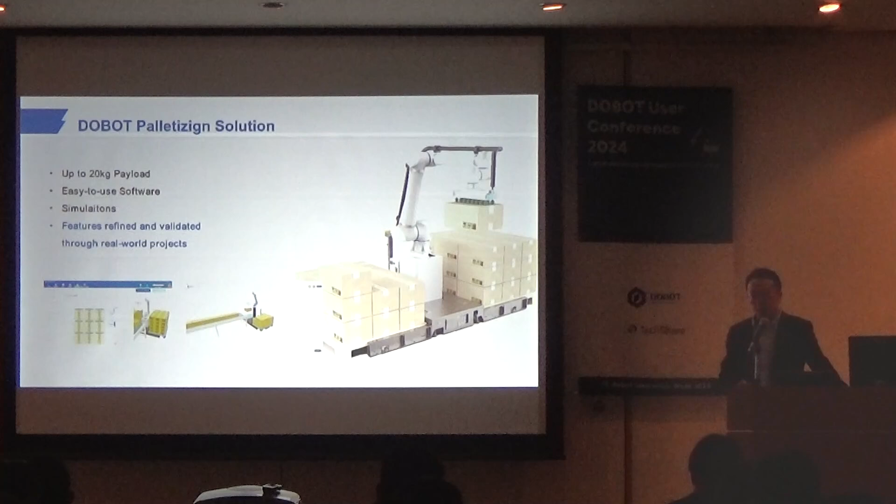And we also had the palletizing solution. We launched this at the beginning of this year, and this year we have more than hundreds of palletizing solutions running in different factories. And in the next speech, our colleague Tamara-san will talk more about the palletizing solution. So I will skip this part.

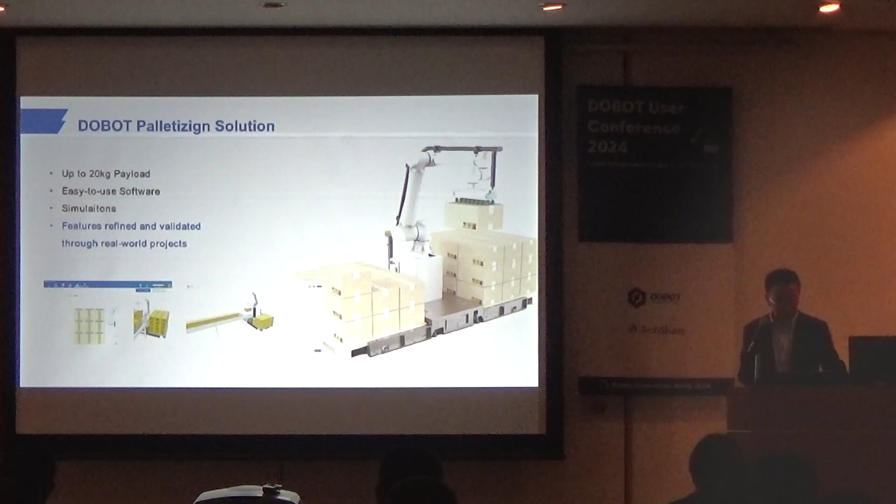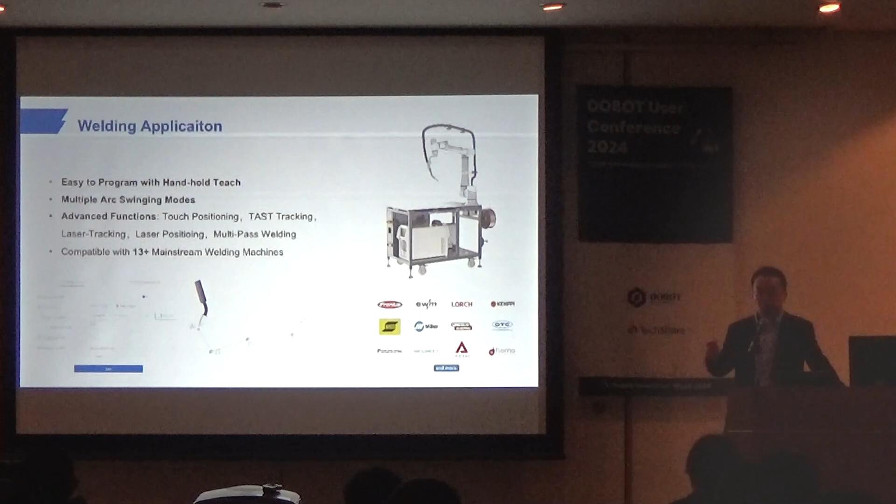And the next one is welding. Welding is usually done by an industry robot, but the cobot is very easy to use, and it has this hand guide teaching function. So you can hold the robot to the right position, and you can teach the point. In that case, for welding, if you want to teach the robot the welding path, it becomes much more efficient. And the cobot is also lightweight, so you can move the robot to a different place.

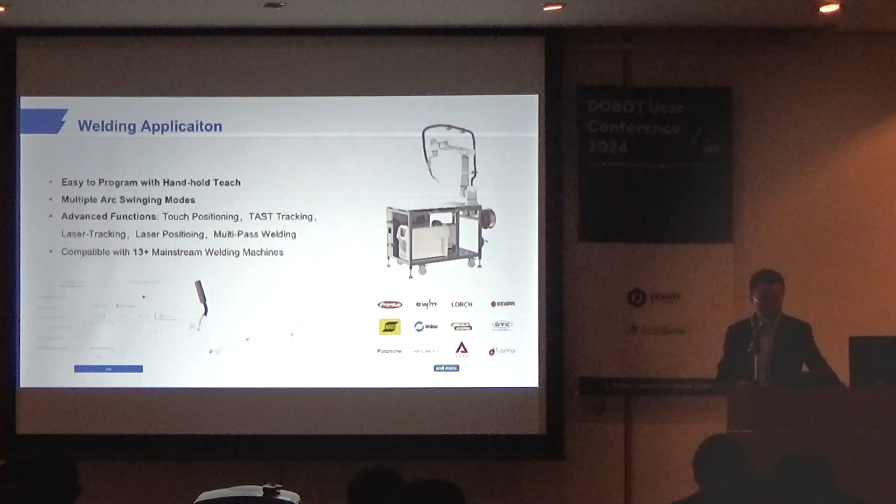And especially we see in shipyards and some steel manufacturing factories, people put the robot on a magnetic seat, so you can attach the robot to different places. And we also have some multiple arc swinging modes, and during the year we also developed some advanced functions for welding, such as touch positioning, laser tracking, laser positioning, and multipass welding, especially for thick steel, where you need multipass welding. And we are also compatible with more than 13 welding machines, and the number is still increasing.

And lastly is DOBOT X-Trainer. DOBOT X-Trainer is a platform to explore imitation learning. That's also one direction we are trying to explore. And this is a platform with two master hands, or so-called primary hands. And this hand is used to operate the slave hand. And here we use Nova 2 as the slave hand because of the high precision.

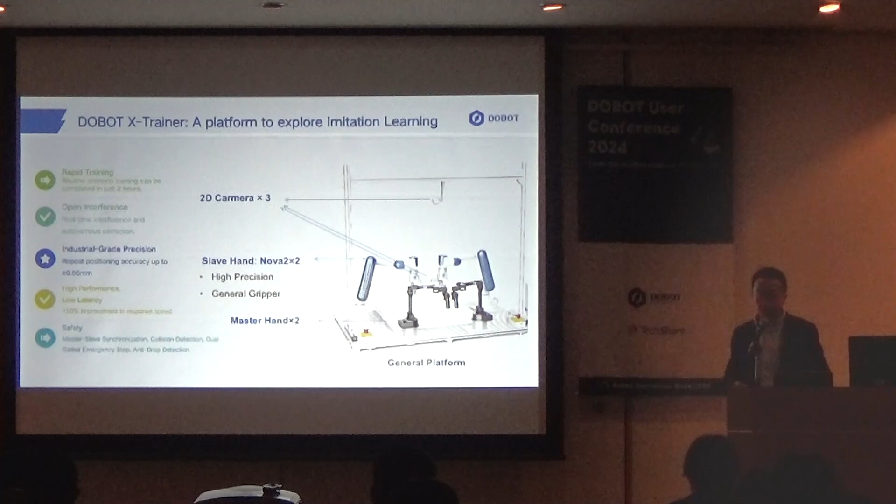And at the end of the slave hand, it has a very general purpose gripper. And there are also 3 2D cameras. One is on top of the framework, and the other 2 are at the end of the robot arm. So, what is X-Trainer? I will explain with this video.

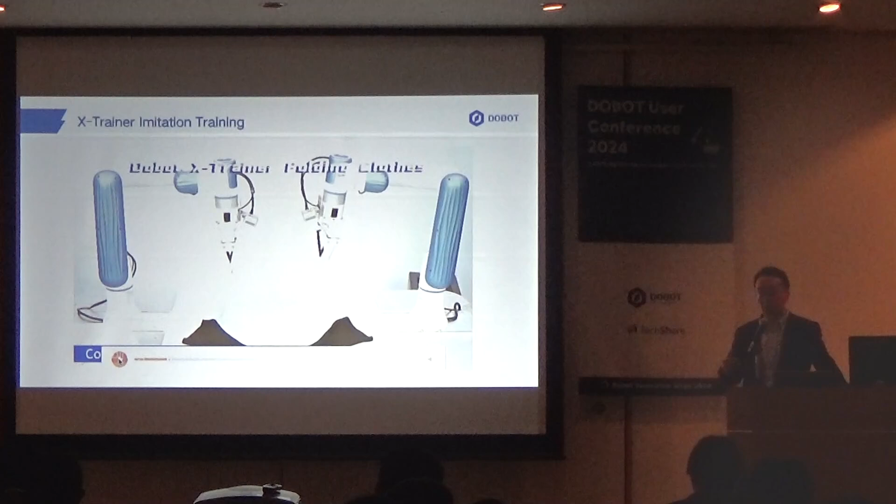So generally, robots are very good at standard and repetitive tasks, especially some standard processes. And to do that, we also need a very standard environment, or so-called structured environment. So the robot knows where the object is and where to put the object, and the environment is constant. But the challenge is that you need to set up the environment for the robot, and you cannot make changes. Or if the environment changes a little bit, you have to reprogram the robot again.

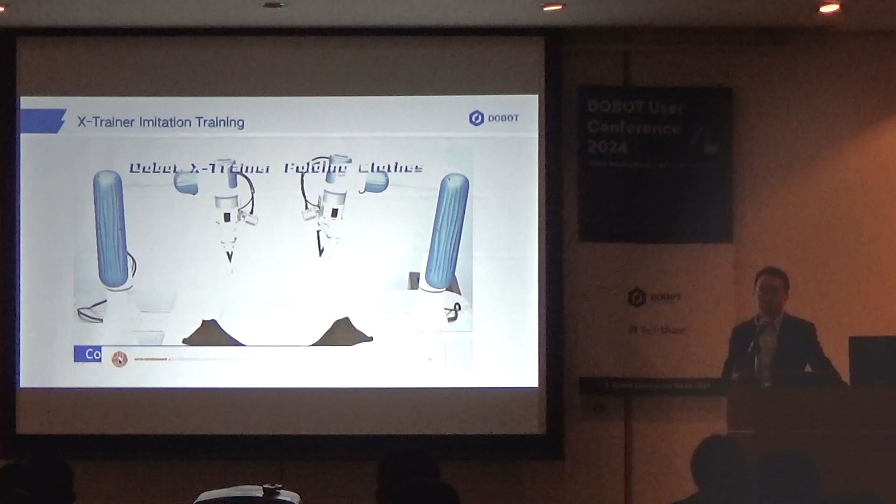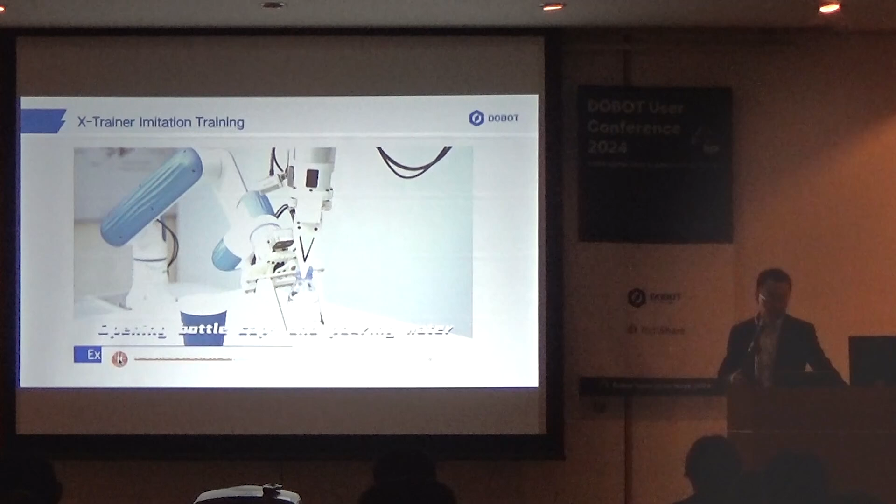For example, for CNC machine tending, if you put a cube inside the machine, it's one program. But if the object is a little bit bigger or a little bit smaller, you need to reprogram the whole process. But with AI developments, the situation could be different. In this case, we can see the 2 Novas folding a t-shirt. And that's very difficult for an industrial robot without AI because clothes are not a rigid object. And there are also some other examples, for example, pouring water into a cup, and handling ping pong balls on the paddle.

But with large language models, you can train the models, and the models control the robot based on the vision perception. And how is it? I'm going to talk about that later.

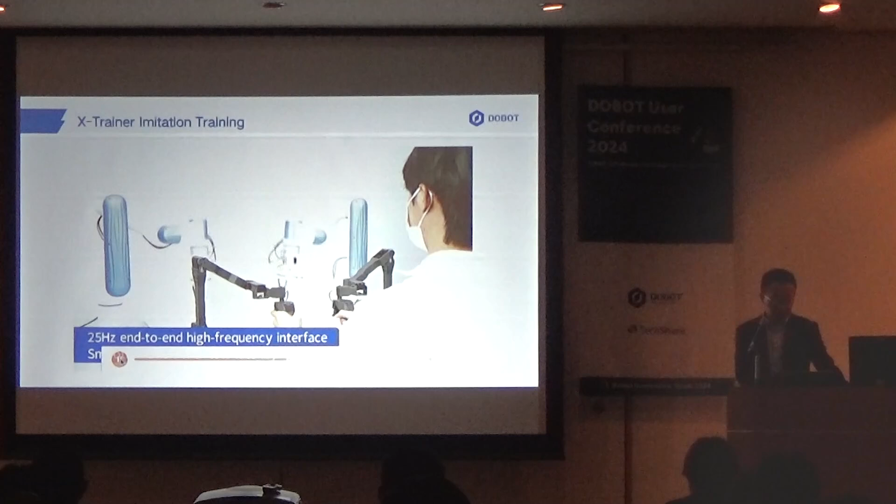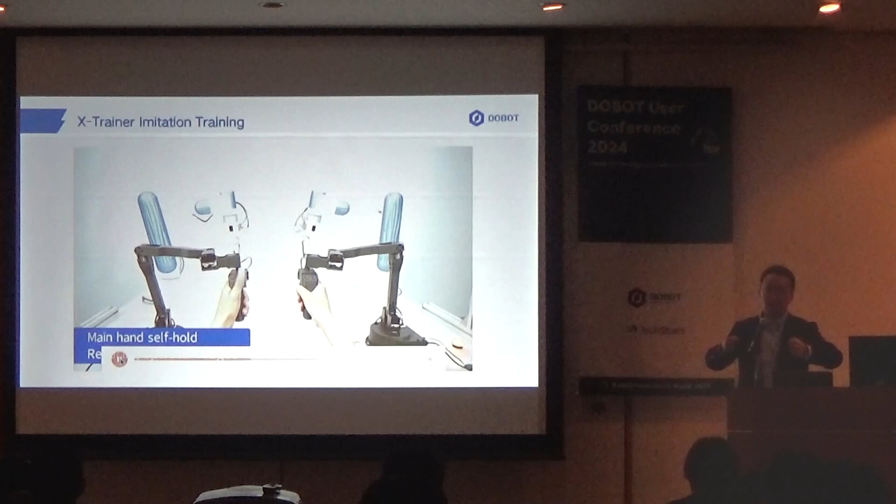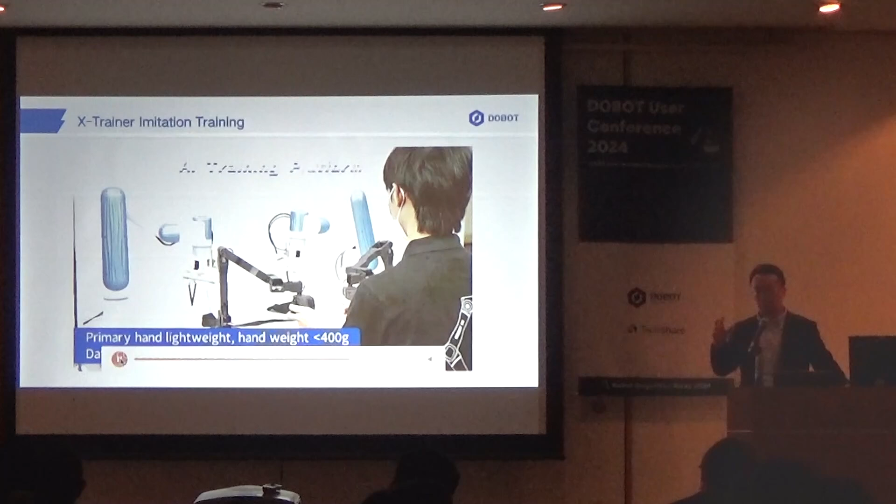So this is a part of introducing what is the hardware. So this is like two primary hands, and you can hold the two hands to manipulate the slave hand. And there are cameras on the slave hand, on the Nova. So during the process, the cameras will take videos. And this is part of how we train the robot to do such a task.

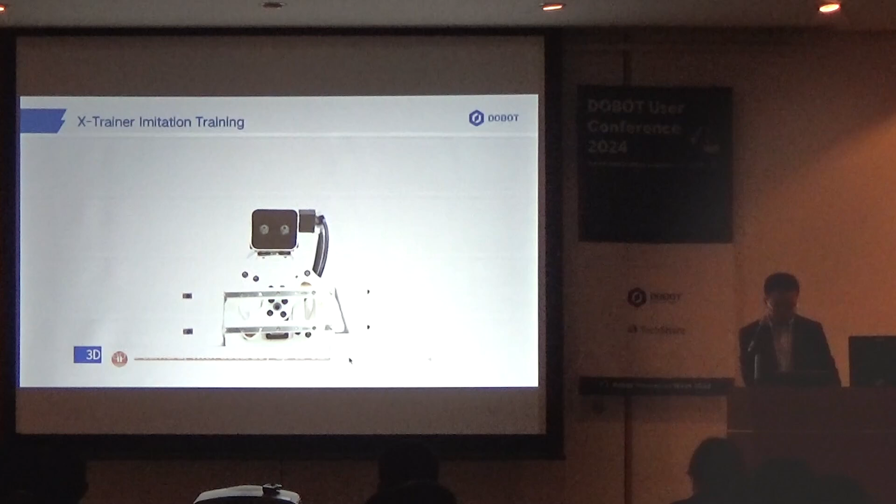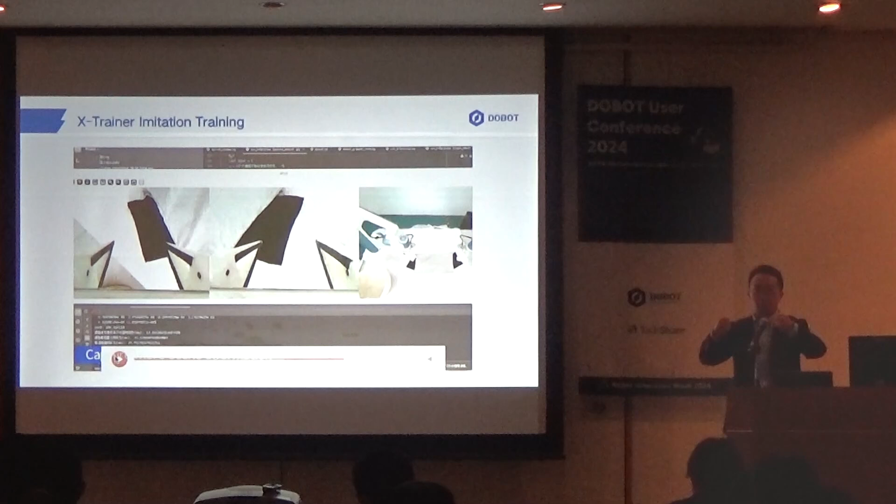So first, I'm going back a little bit and explain this again. So basically, you use the two master hands or primary hands to operate the slave hand to do the work, some kind of teaching. So you teach the robot how to fold a t-shirt.

And during this process, we record the movement of the robot, the trajectory, the points, and maybe some other data. In the meantime, we also record the videos from the three cameras. And based on this input, we teach this robot to do this task many times, for example 50 times, 100 times. At least for now, we need a lot of data to train the robot.

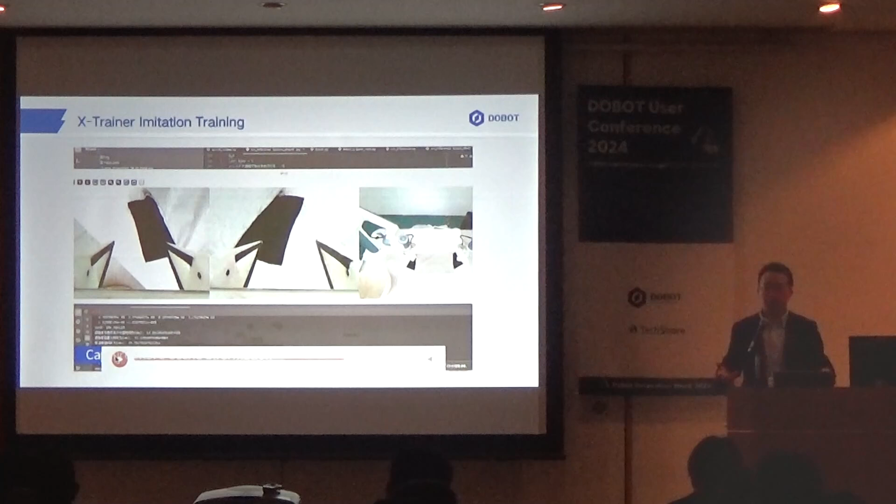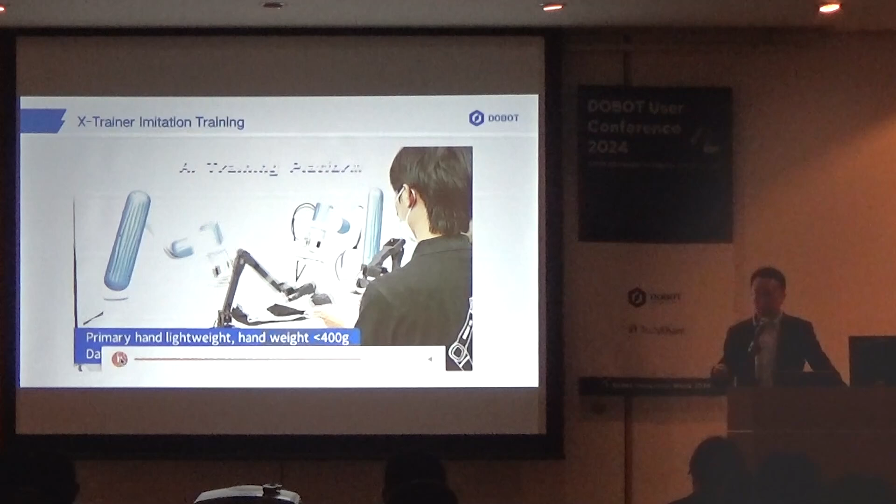And after training, we put all this data with this large language model or some special AI models with robots, and we train them and refine the models. And after that, the robot can do the whole process based on the vision feedback. That's how we do it.

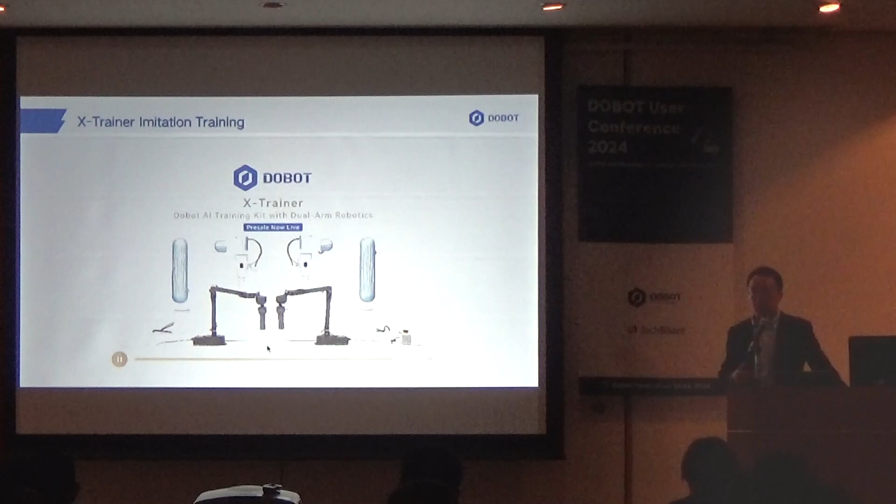But it's still the early stage of this exploration, and this is a platform for exploring this possibility and also collecting data, doing the training and finding out what's next. We all know that AI is developing very fast, especially with large language model technology. And in this direction, there are also a lot of models designed for robot manipulation. That's the direction we are trying to follow.

And with these AI models, I think in the future, people don't need to program the robot point by point or trajectory by trajectory, or set up the I/O on/off at a very specific point. You just need to show how the work is completed, and the robot can learn from the cameras or other sensors, and the AI models can control and program the robot automatically. So it's totally different from what we do with robots today.

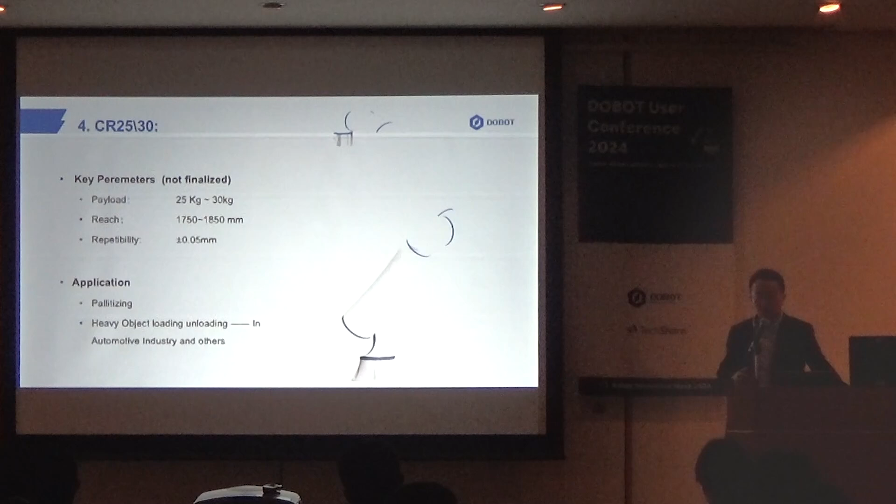And the target application is palletizing, especially since today we are promoting our palletizing solution. In some factories, there are boxes with 22 or 23 kilo weight, which is a little bit more than the 20 kilo payload robot we have today. And also for some heavy object loading and unloading tasks, like for example in the car industries, for some engines or other heavy objects.

Another important thing is about DOBOT Plus, more plugins. So collaborative robots are targeting small batch but high variety products, and in that case, making redeployment much easier is very important. So we want to make system integration much easier, and in order to do that, we need very standard hardware and very easy, convenient software.

That's what we call DOBOT plugins and DOBOT Plus. With DOBOT Plus, we're going to connect with some robot makers or gripper makers inside the industry, and we are going to cooperate with them to make the hardware standard and make software plugins inside our software, so you can connect to the hardware directly and control it with the plugin. So you don't need a very complicated manual and hours to research the communication protocol of the grippers or sensors.